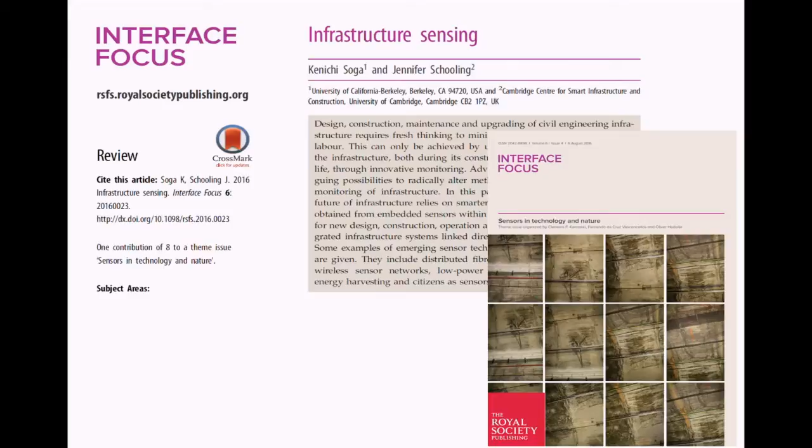They're doing a 5 year renovation, started in 2013. The London Bridge Station is one of the oldest stations in London, and there are a lot of passengers per day using this particular station. The challenge is that this renovation is done over 5 years' time, so trains are working as well as construction happening. It's a very busy station.

As I said, London Bridge Station is one of the oldest stations in London. Of course, in San Francisco we have old things too, but in London there are even older things. You can see that in 1836 it started as a sort of a purple part and kept on expanding, and you can see how it started in 1836 and then how it looks like right now.

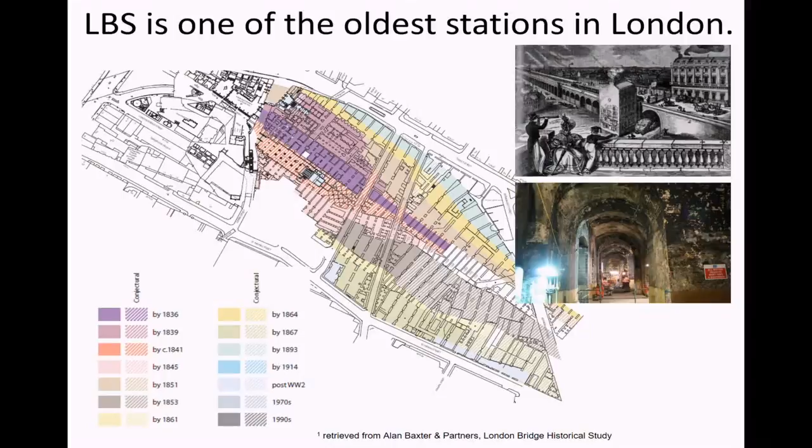Then in the 1970s, they said, okay, let's try to change the station dramatically. London Bridge Station was last redeveloped in the 1970s, and in 1972 they had a vision of trying to change the station: two old rail stations would be merged into one with higher capacity, giving easy interchange between buses, tubes, and trains. As you know, tube is subway.

And direct access to all services from a spacious concourse with new bars, buffets, and shops. So bringing all things together. In 2012, right now, there's a new renovation happening over at London Bridge Station. And the vision there says the number of platforms will increase and the track layout will accommodate higher capacity trains. At the same time, existing bus, train, and Underground services, like the Tube, will link to the largest concourse in the UK, which will offer a variety of retail services like bars, buffets, and shops.

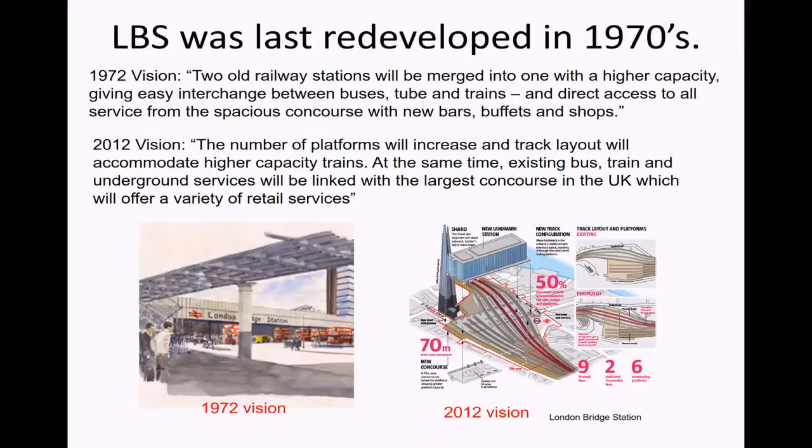So again, after 40 years, they're saying the same thing. But in civil engineering, we tend to design our infrastructure for 100 years, 120 years design life. So there's a mismatch between how we use our infrastructure and how we design our infrastructure. Think about this as the population of London. I stopped here in the 1970s when they were doing this first big renovation. So London's population was going up, and after World War II, it started to decline. If you're over here, how do you want to predict?

So then you start to say, okay, what's going to happen in the next 100 years? But what really happened to London is that it went like this. And these are the predictions. So you can see how we predict over here, and then the usage of the station changes as the economy changes. But then we tend to design for 120 years. So there's a mismatch there. Again, this is a prediction after, as you know, Brexit. We don't know what's going to happen. So again, that's the difficulty we have.

So our 100-plus design life concept may not be compatible with the actual demand in the future. Is it? And then making our civil infrastructure, so I'm a geotechnical engineer, more adaptable. So rather than making a very rigid structure, can we make it more adaptable? And I think in the building sector, that started to happen. Are we over-designing it? That means that we're doing 120 years to make it really, really strong. But actually, in order to do that, we need to understand the actual performance to improve our design.

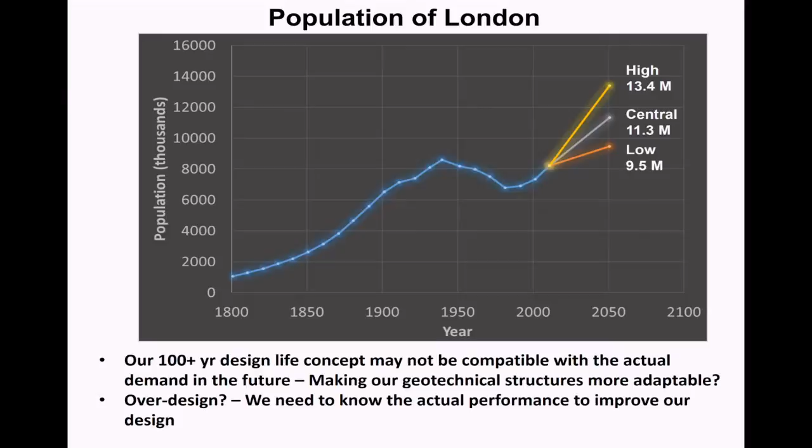So at London Bridge Station, we've been trying different things. Of course, the difference between the 70s and now is that we have the Internet of Things, a lot of technology that evolved in the past 40 years. So I'll talk about fiber optics monitoring, but you can do computer vision technology or count the people very quickly and then do some real-time monitoring of movements. Wireless noise monitoring, because they have hospitals around, to make sure that the construction doesn't produce much noise. Social media tracking.

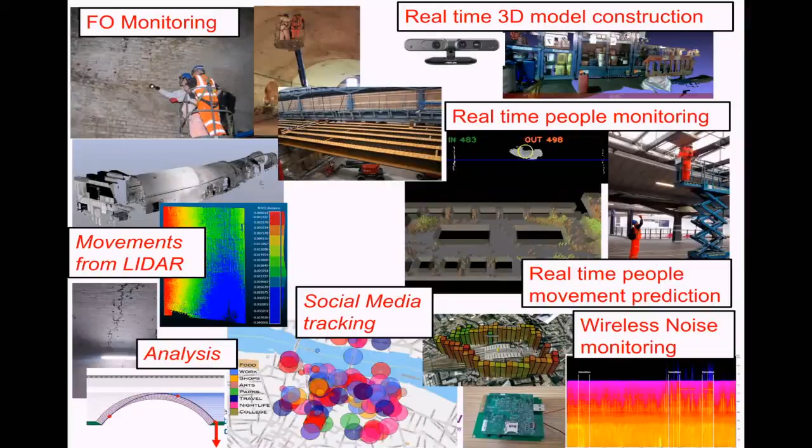And then, as a civil engineer, you want to use some movement and make sure that we do engineering analysis. So, for example, this one is predicting during the construction how people are using the station, and also doing an agent-based model to predict how people are using it, trying to do that more in real time. So when the train comes later, how do people use the station, and can we divert the people in a better way? And that started to happen using these sorts of simulation techniques coupled with monitoring of people.

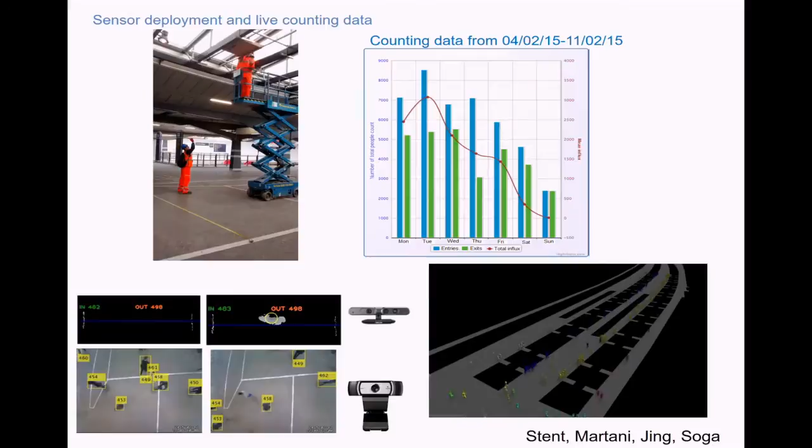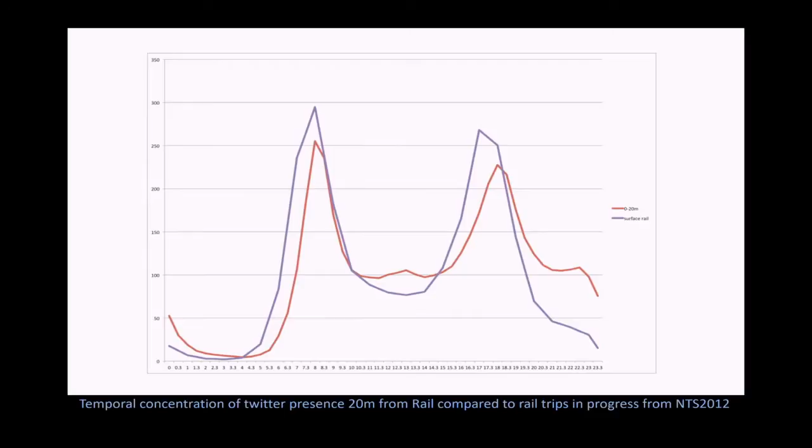This is the Twitter usage of that station, and you can see this is one day, the frequency, and it shows a peak in the morning, and then in the afternoon when you go back home, it peaks again. Which one is Twitter and which one is the actual counting? The red one is Twitter, because Twitter people come late to work. They may go later and have fun. But then you can get the data without using much manpower. Looking at the Twitter data, perhaps you can see how stations are used.

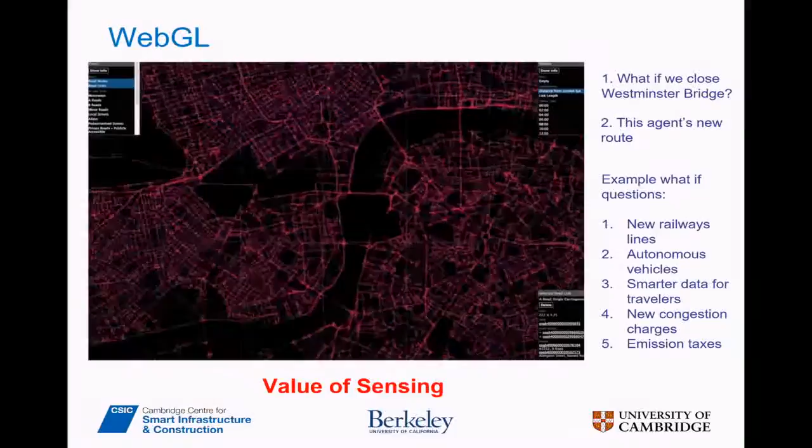So you can start using all these sorts of techniques, like this is a WebGL base where we're looking at London as a city, as a transportation network, as well as the railway network, how people are using it. And nowadays you can use Transport for London data or Google data. We accumulate all these together. And then behind that, we start to look at scenarios. For example, what if we close Westminster Bridge?

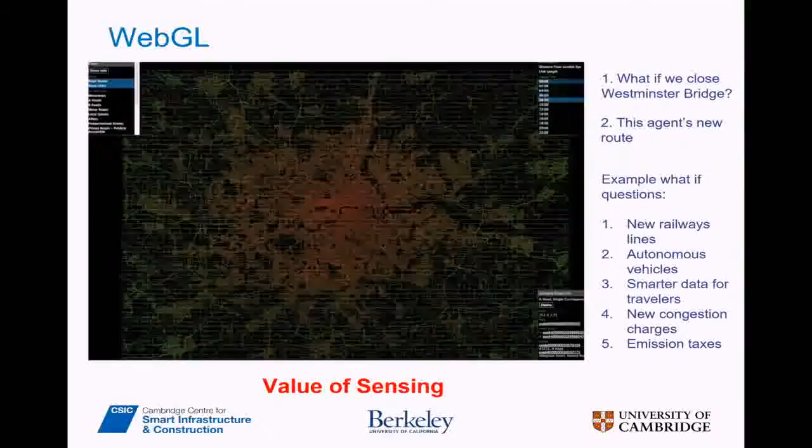There's a new agent, so if you have new railway lines, if you have autonomous vehicles, smarter data for travelers, how do people do? And then you can start looking at how in terms of policy-wise. But it's really trying to figure out value of sensing, because you want to put sensors, like me, I want to put sensors because that's my research. But then people say it's too expensive, so you have to start showing the value. And I'll come back to this value more.

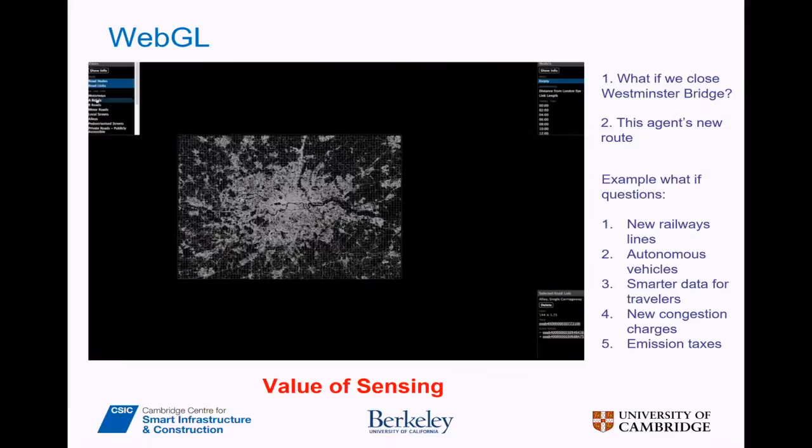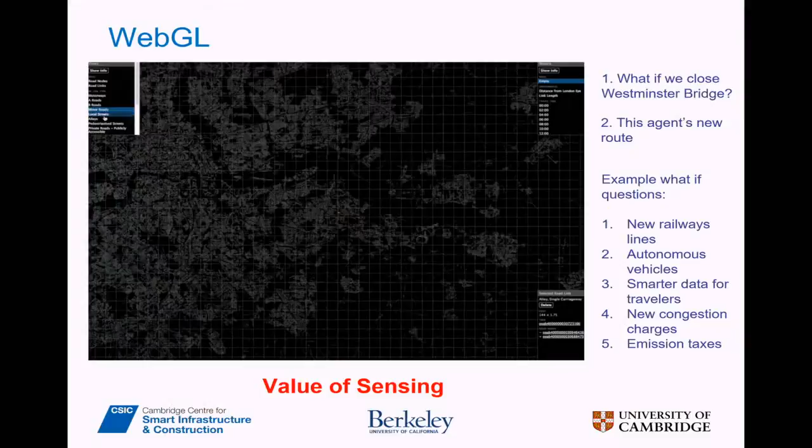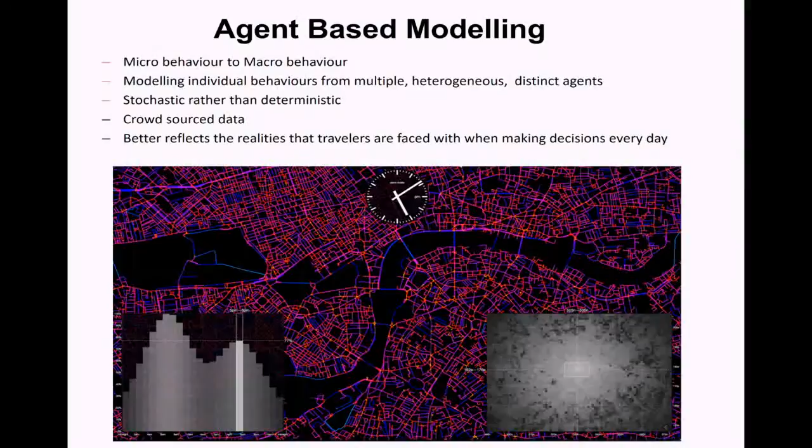But you can see how interesting the computer science is coming into, of looking at lots of data of different things. Some data comes every second, some data comes every year. So for example, we're looking at road maintenance. This is an agent-based model. Basically, you have agents within the city and then see how micro behavior addresses the macro behavior. And these are very computer intensive. By using high-performance computing, it starts to become realistic using crowdsourced data. So these are interests to our civil engineers.

So for example, if you have these data, can we do road degradation better? Because at the moment in London, we only have data every year, one particular point every year. And it would be great to see how people are really using the road and how they're reporting, but also see the real degradation of the road or railway using those data.

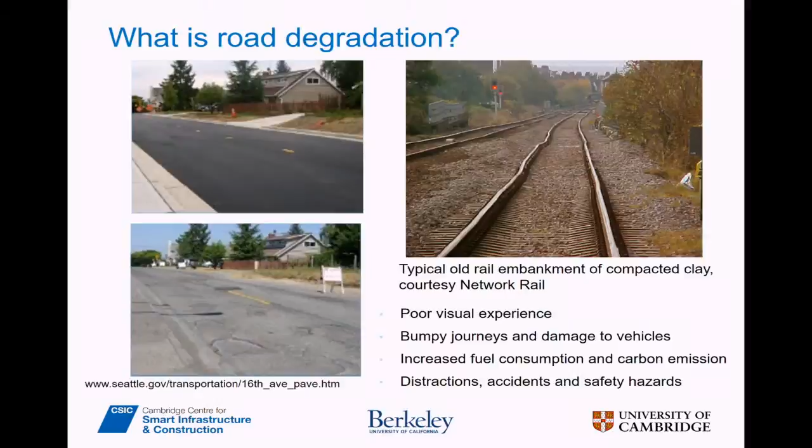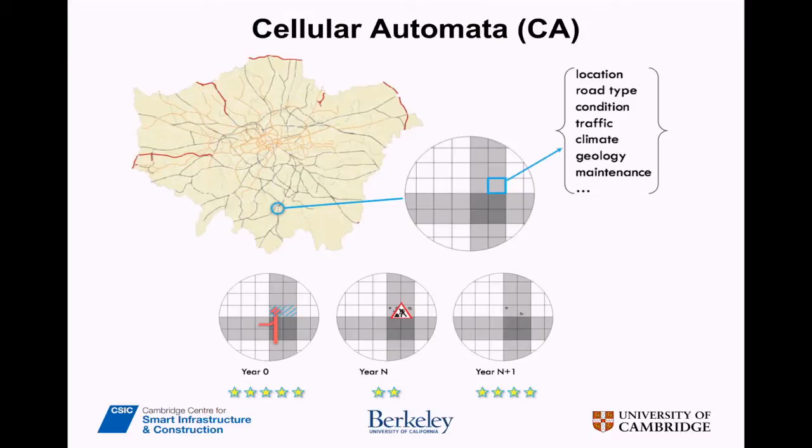And that leads to another technique called cellular automata. It's really a sort of land-based, agent-based model trying to see how the roads are degrading, using crowdsourced data. So that's something we want to go further in civil engineering. But what I'm trying to introduce today is really about sensors.

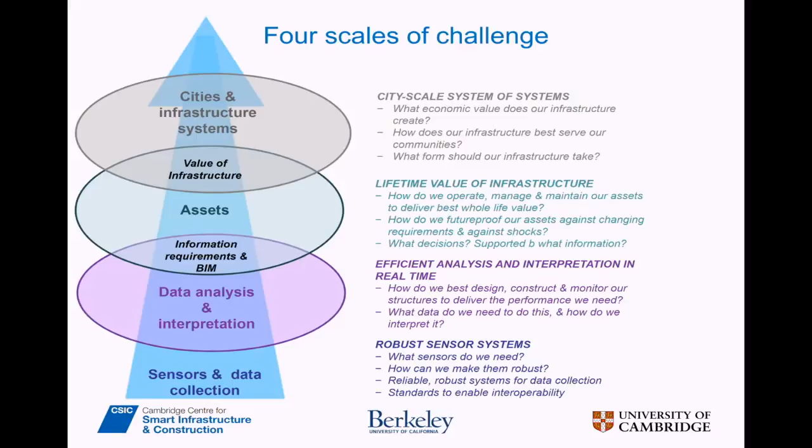The strategy is having sensor data help us understand assets like bridges, roads, or tunnels in terms of data analysis and interpretation. That will lead to how you manage your asset. And once you know how to manage your asset, the city will have different assets. So how do you combine these together to look at the whole city? There are a variety of questions at different scales, but our real interest is how these data come across throughout the scales. That's the challenge, but that will be our interest as civil engineers.

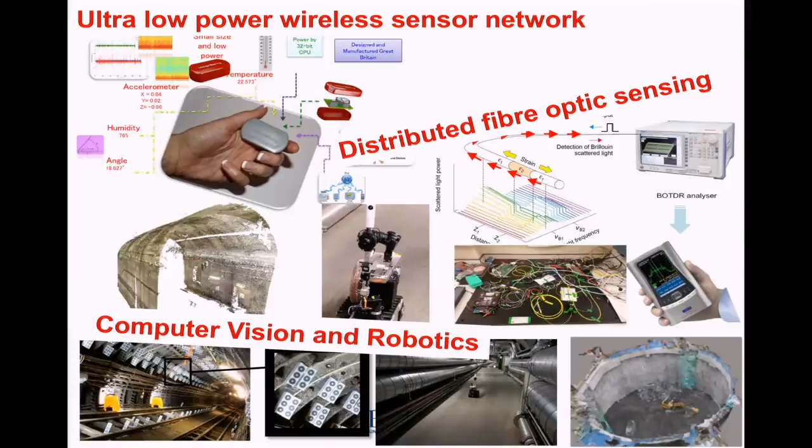When I was at Cambridge, and I continue to do so, we've been working on ultra low power wireless sensor networks. I'll talk about distributed fiber optic sensing because this is quite interesting technology from my point of view, and computer vision and robotics.

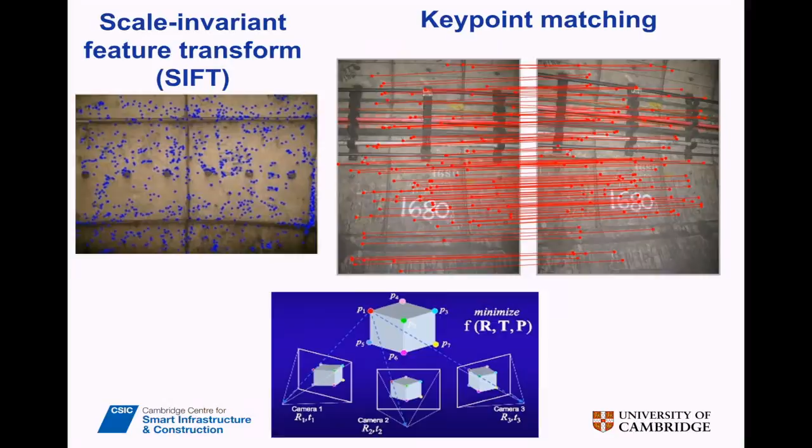So for example, computer vision is quite interesting for civil engineers because if you go to a tunnel, each concrete panel looks very similar to you, but from the computer vision point of view, it has a fingerprint. If you have two images from different angles, you can match the fingerprint, and for a given point, with 3 images or 2 images, you can triangulate to create a 3D model. You can also see where your cameras were at that time. So that allows you to start creating a model just from images.

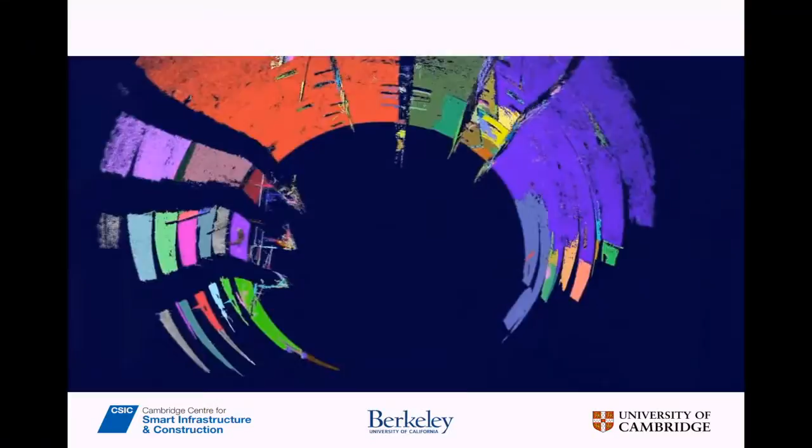So really taking images, this is work done closely with Toshiba, and then reconstructing 3D points, so just from the images you can create a 3D model. Then you can see what the model looks like. You can see some of the cables which you don't need, so you remove them. But you can see very detailed structural components just from the images. And then you create a 3D model to do engineering analysis. The important thing is that after that, the actual 2D images will have 3D points.

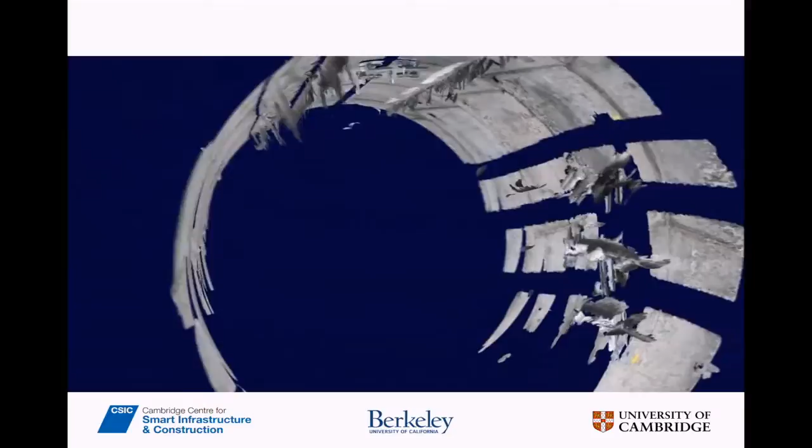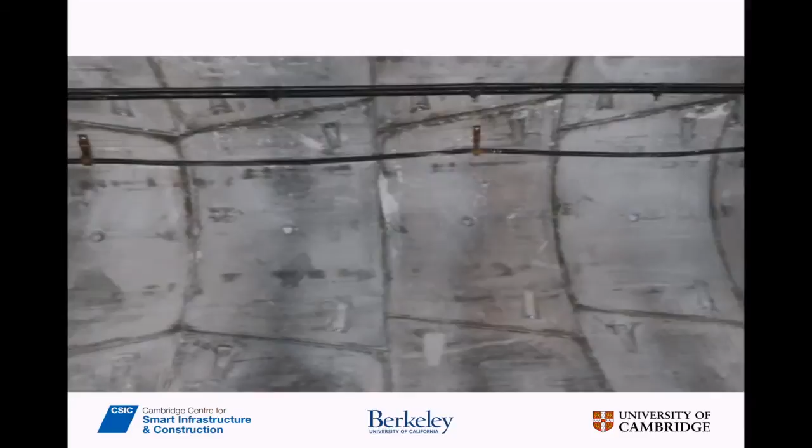That means that you can attach the images on top, mosaic it in terms of images, and put it onto your sort of a cylinder in this particular case. And that gives you a map of your tunnel with images which is very, very highly precisely calibrated in terms of the coordinate system. Once you do that, you can have it like a globe, and you can make it flat like this. But then each point has 3D points.

So let's say later on, if you take another image about 1 year later, you may have a new splash over here. What you want to do is compare with the images from 1 year before, but they may be taken at different angles. But because each has a coordinate point, these old images can be warped to the same position that the new images are taken. So this one is rotated so that you're looking at this image from the direction of the new image, which allows you to do change detection.

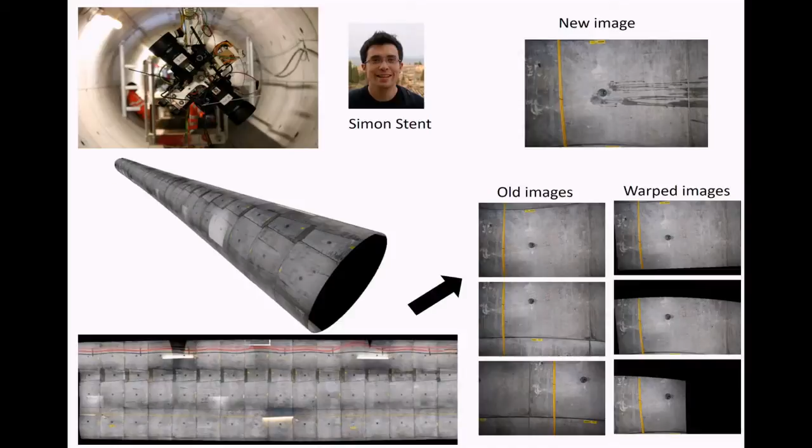And so in tunnel engineering, what we're interested in is cracks. What kind of cracks are we interested in? Actually, we're looking at 0.3 millimeter cracks, and are they growing or not? So this is the scale that we're interested in. We're not interested in 1 centimeter or 1 inch. We're interested in really small movements. And by doing that, you can take an image and then see how things are changing.

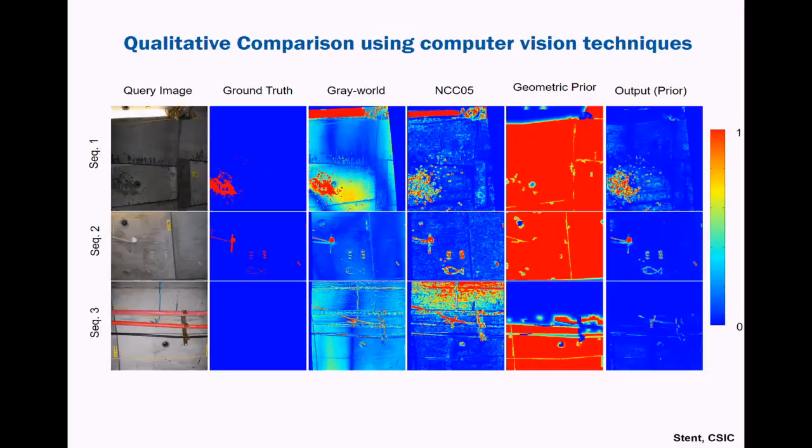And you can use certain computer vision techniques and machine learning techniques, perhaps, to find the change detection. For example, these are the splash markers, and these are different algorithms to find the change detection, ground truth versus some sort of analysis. This one is another ground truth. If you look very carefully, there's a small fish that our student drew on the tunnel lining, and it does detect it. But for example, this one, we didn't do anything, but it did detect something.

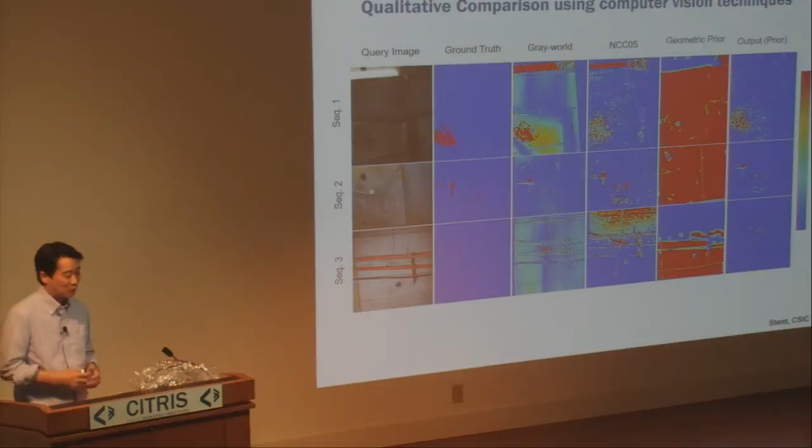So there are still a lot of things to do, and my point is that nothing is perfect. I think we have to do more research in this area, and I'm really interested in working with some of you who may be interested in this particular area.

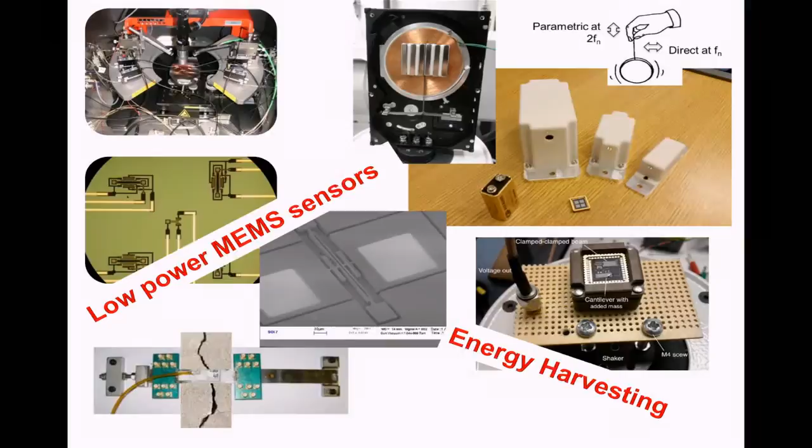Some people, like for bridge bearings, actually want to know how many small movements you had per day, how many mid ones, and how many big ones. The numbers may be very interesting to us because that tells us how it degrades with time. But the point is that if you have one data point, you miss that particular event, and then it's gone. So having information about the history is very, very interesting for us. That requires low power, but energy harvesting can do that.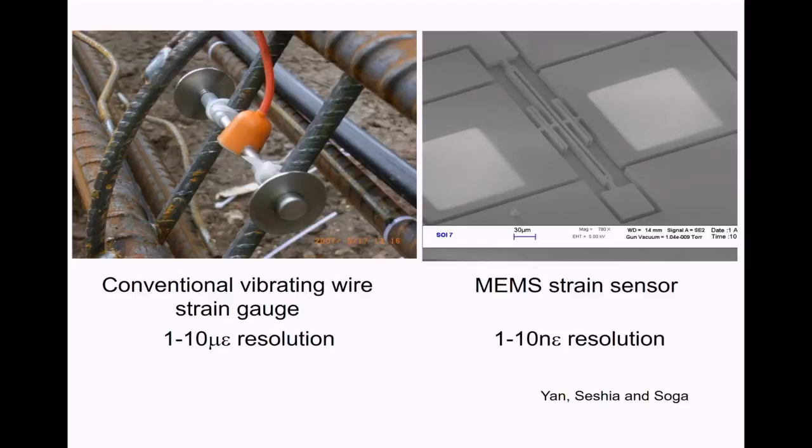For example, in civil engineering, we use a device called a vibrating wire strain gauge. This is a strain gauge which is very, very robust. Within this system, it has a string inside. If you strain it, pull it, or compress it, it's like when you play a guitar: if you tune it, you change the resonant frequency and it gives you a different sound. So that's the same thing. If you stretch it more, the resonant frequency changes, and that's how it works in this particular system.

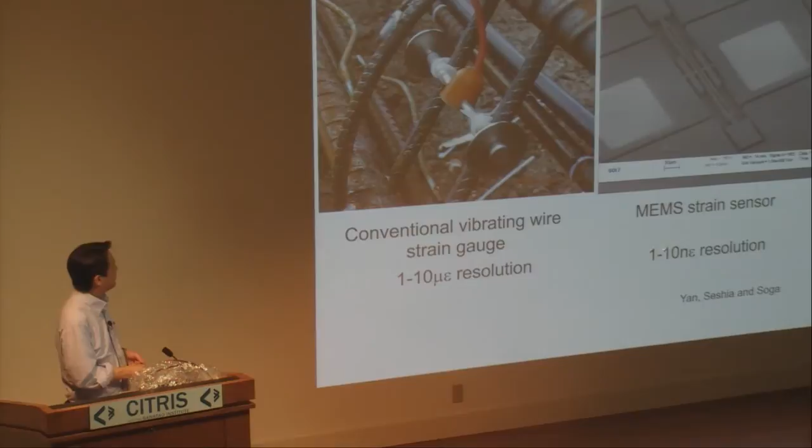And we made a MEMS version of that. So this is a MEMS version, which is small, but also made in a certain precise way. This one may give you 1 to 10 microstrain. This may give you 1 to 10 nanostrain. Whether we need it, I don't know, but it'll be fun to see if you get the data.

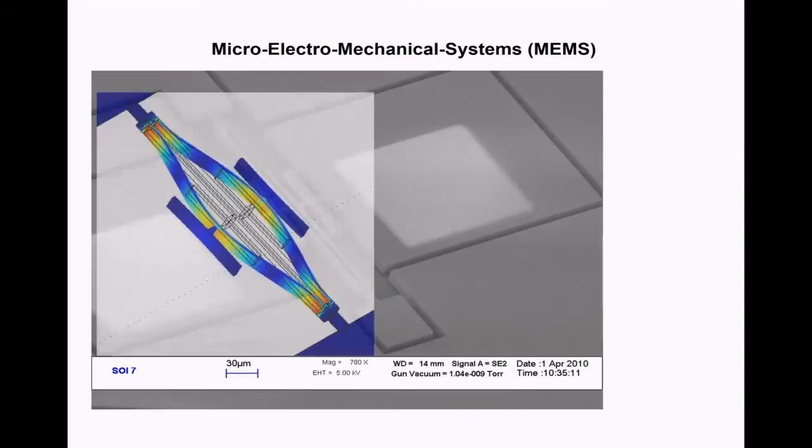So again, you have this structure made using MEMS technology. You have a suspended beam, and these are the 2 points that will strain. For those who are in structural mechanics, this is the one that gives you the vibration of that particular structure at different strain levels. My structural engineering colleagues will say this is easy to analyze. So this is really a small device. This gap is less than 1 micron. But you actually do a resonant frequency analysis of these devices at different strain levels.

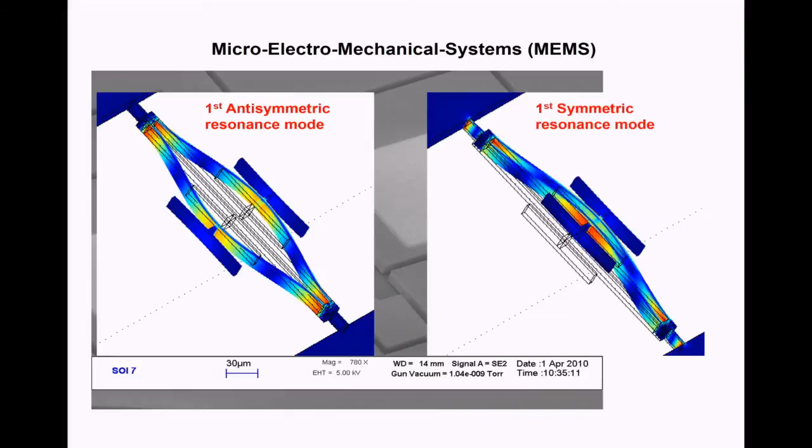So once you do that, actually, you have this amplitude versus frequency, and if you apply different strain, the peak frequency moves, and that gives you how much strain you applied. And by putting these devices at different directions, you can get strain at different directions, because, as you may know, strain is not only one direction. Actually, in reality, we have 6 strains in structural mechanics.

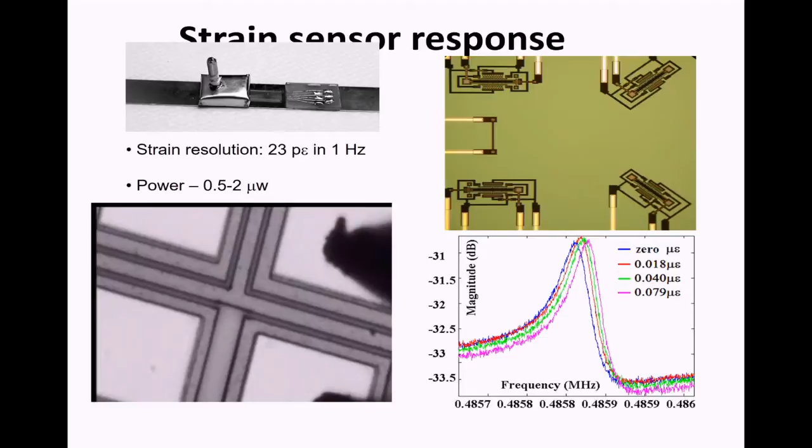But the point is that these are small devices. It can be just fun, but if you have a very good eye, it's moving. Can you see? It's an eye test, sorry. But the point is actually it has a very low power, which is quite interesting for us.

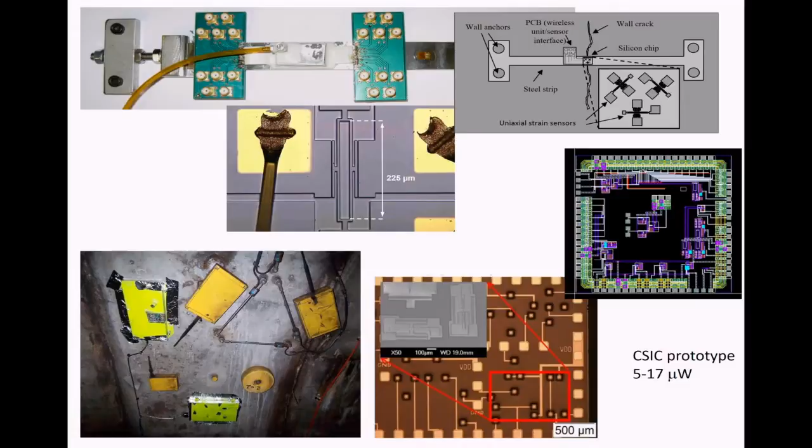So in this particular case, we made this device and put it in a tunnel in Prague, in Czech Republic, because this particular tunnel was flooded in 2000-something. And then the issue is, after the flooding, how is the degradation happening? So we wanted to monitor.

So there's a crack over here, and above here we had this crack gauge, which is a simple crack gauge. But it did have this MEMS strain sensor, which is aligned this way to understand if the crack is really opening or if it is sliding relative to each other. And then you can make it as a sort of a chip, which we're trying to do at the moment.

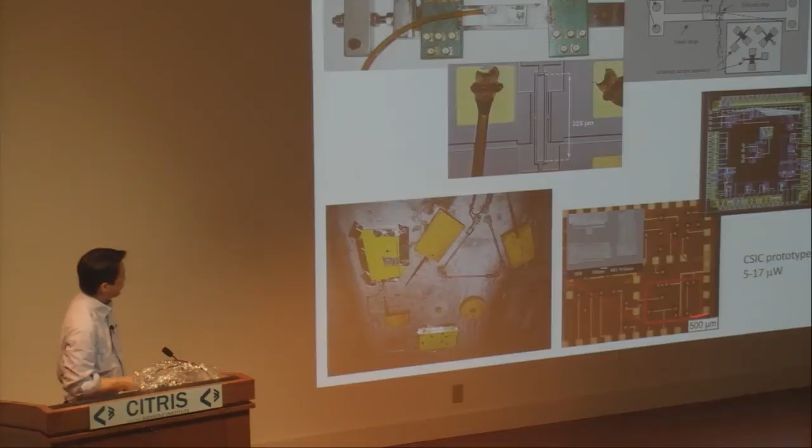So if you have a sort of a strain sensor or accelerometer, you see accelerometers. Some of your iPhones do have these accelerometers, cheap ones already, and they're very cheap. So you can make the strain sensor. I haven't seen much in the market, but we hope it will come in. But if you have these small, low power sensors, energy harvesting like vibration, temperature, pressure fluctuation, airflow can power it up to get the data. And once you need the data, you may send it wirelessly.

So in terms of power, there are a lot of ways to get power. If you walk, you can get power. Water mains, actually, if you look at water mains, water pressure fluctuates at a very low frequency, but you can sort of ramp it up to get this pressure energy, like winding your clock, for example. You can have solar power, but in tunnels, which I work on, it doesn't work. And then airflow is good for tunnels because, as I'll show you later on, when a train passes you have flow. And then vibration is another one, but temperature is also an interesting one as well.

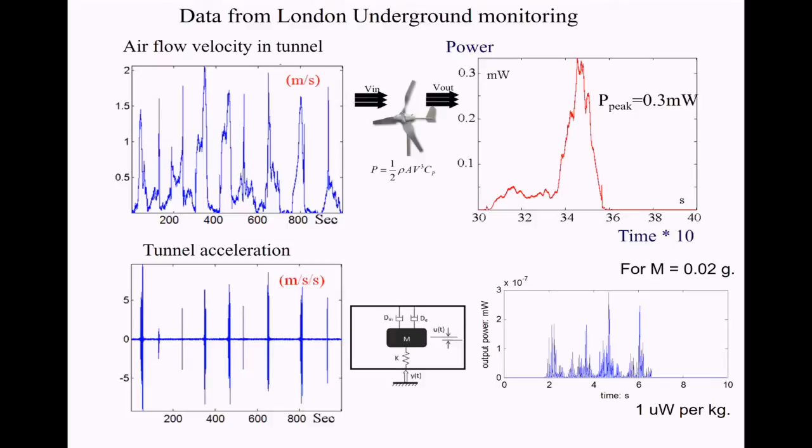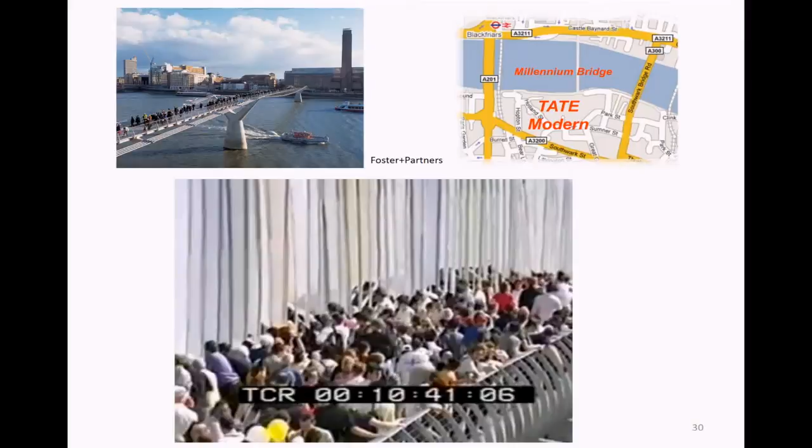Tunnels do vibrate, so you can have vibration and then try to get energy through that and then keep on monitoring your infrastructure through that. Vibration is very interesting. So I'm not sure you've been to London. If you go to Tate Modern, which is a very nice museum, which is over here, they made a new Millennium Bridge in 2000. The bridge was interesting because when they started opening it, people started walking, and it wobbled a lot.

So people are walking, and then the bridge is moving a lot. But if you look very carefully, people are rather synchronized. Initially, they walk in a different way, but then eventually they synchronize. See? Can you see it? That's really interesting. And probably you may have seen this because some say they've seen it.

Now, this is Professor Ikeguchi from Saitama University. He had a bridge with metronomes, lots of them. So you keep it going. You keep it going. And you keep it going. For about 2 minutes or so, it becomes like this. There are some odd ones. But if you see it, it will come together. So it's so fun, actually, in terms of vibration.

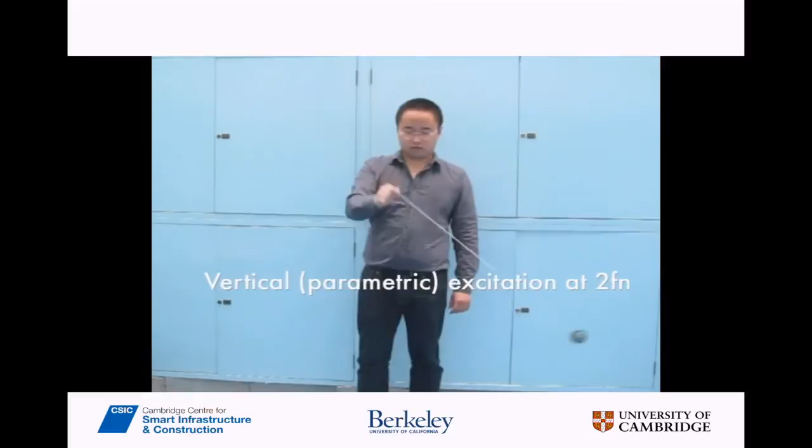When a pendulum is allowed to freely swing, it oscillates at the natural frequency, as you can see in the horizontal direction here. As I apply a horizontal driving force at this frequency, resonance is achieved as amplitude builds up. However, if I apply a vertical driving force at 2 times this frequency, amplitude can grow even larger as parametric resonance is activated. So it's a sort of nonlinear vibration system.

A scale piezoelectric vibration energy harvester prototype mounted on a mechanical shaker. It is currently driven into direct resonance. Take note of its displacement amplitude. So this is direct resonance. Now this is the parametric resonance. The prototype is now driven into parametric resonance at the same acceleration level. With time, the oscillatory amplitude grows to a much larger level as an internal energy buildup is achieved. This demonstrates the superior efficiency of parametric resonance over its direct counterpart.

So that sort of interesting nonlinear vibration can be used to absorb energy, for example. If you don't believe me, I brought a yo-yo, so you can have fun later on. That particular device is shown as a yo-yo, and then, of course, there's a threshold that you have to kick in, and that's where you have your engineering. How do you make that threshold smaller, and then you make a macro device.

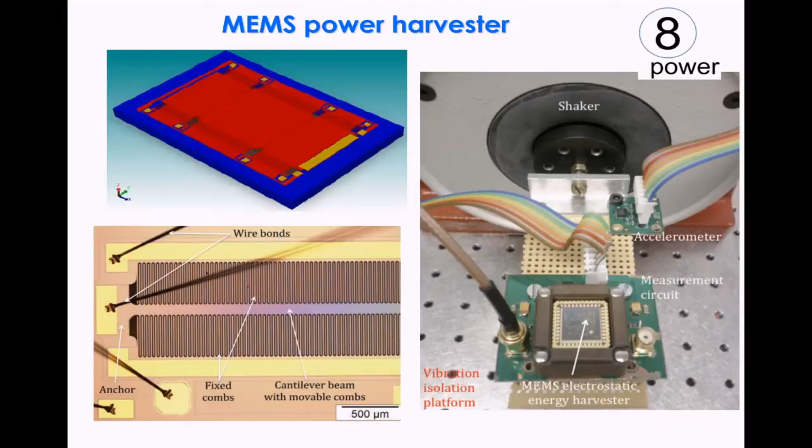So this is one of our macro devices that has that yo-yo inside, but it's not a yo-yo. You can make these in different shapes or sizes depending on your need, but of course, the bigger the mass, the more energy you can absorb. But you can make a smaller MEMS version of that, and you can have lots of these to generate enough energy to power, for example, this MEMS strain device. And actually, we spun out these devices, so we have a company called 8Power working on that.

So what I really wanted to say in this talk is that value is not a product from our point of view. It's about confidence in delivery in civil engineering. I can't sell you the product by doing TV commercials. I have to do a lot of things to demonstrate it works in the real field. My colleague from London Underground, Keith Bowers, says that innovations have more chance of adoption if their benefits are mapped. We have to show where the benefits are coming from. Rather than just saying, please buy my product, it's saying you're going to get this data, and this data will give you this.

And of course, best practice is very important. My colleagues and I recently wrote 2 books on distributed fiber optic sensing and wireless sensor networks, published through the Institution of Civil Engineers. What I want to focus on in the next 10 or 15 minutes is a technique called continuous strain profiling using fiber optics technology.

So this is a typical optical fiber, which I have over here. I have different types of cables because some are cheap and some are expensive, but I can pass them around to you. The white one, you can do anything with because it's the cheapest one. But the expensive one, actually, you can't do anything to because it's so robust.

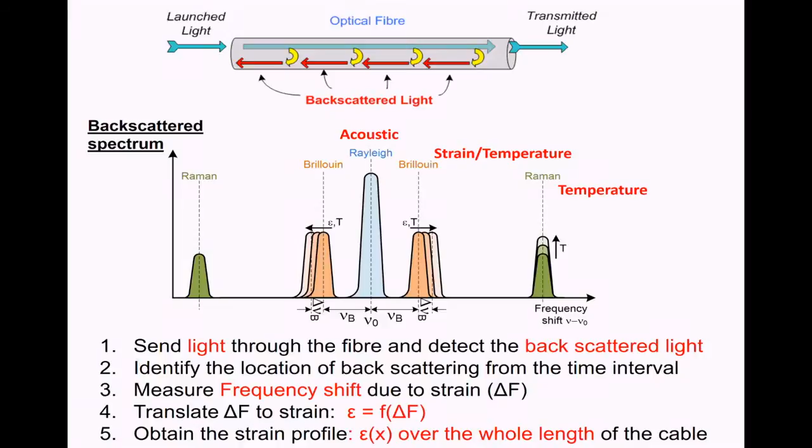So you shoot a light, and let's say if I have a strain at some point, the frequency shifts, and that's what I want to measure. If I can measure that, it tells me how much strain is occurring at that location. I can do that for all the places. That's what the analyzer does.

The analyzer can be expensive. But before that, there are cables like this. The white cable you've been seeing, which only has 1 millimeter or 0.9 millimeter diameter, is probably about 10 cents per meter. The very robust one, used in our civil engineering, is about $15 US per meter. Why? Because probably we're the only ones using it. If all of you start using it, maybe the price comes down. But this one is good because you have the optical fiber coated around a strong nylon with a steel wire to protect things.

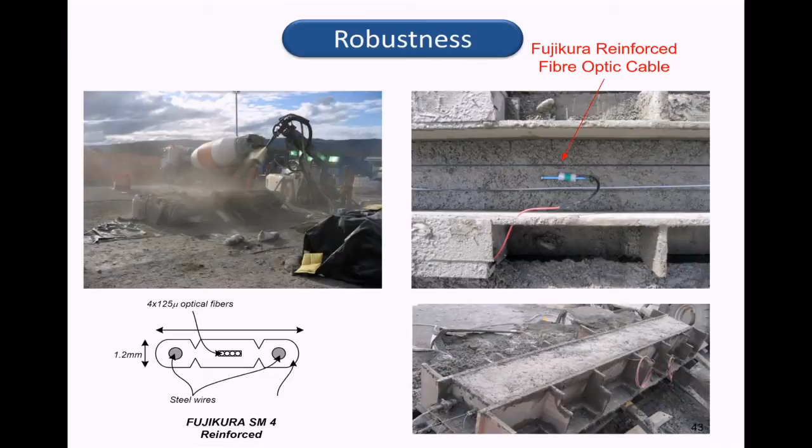You can get different versions with low robustness versus high price, but it's about how you embed these in the structure. For example, when we make tunnels, we excavate the tunnel and do what is called spray concreting. We embed the robust optical fiber, and when we spray concrete, we make a concrete block where the fiber is embedded, and they happily survive.

The analyzer is expensive at the moment. It probably costs about 100K to 200K each. So within my research team, about 5 years ago, I said I can't pay 100K every time I buy these. So I said, let's make our own. Now we make our own analyzer as a research tool.

Now we're moving to more dynamic sensing. Previously, people were measuring static strain because it takes a few minutes or so to get the strain profile for 10 or 30 kilometers. Now we're trying to go dynamic, measuring strain profile dynamically up to 100 hertz, which we're interested in for civil engineering. This lets us look at more vibration characteristics as a distributed strain, not just a point strain.

Just to give you a nice example, this is London again, sorry. This is a masonry tunnel, 100 years old. This is called King's Cross Station, and this is St. Pancras Station. If you want to go to Paris, you take the Eurostar from St. Pancras Station. If you want to go to Harry Potter World, you take platform 9 3/4 from King's Cross Station. But that's where it is.

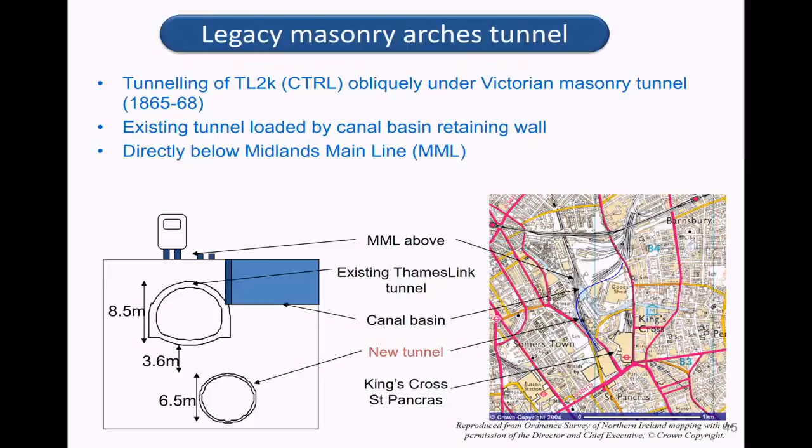So what you can do is attach the optical fiber like this in cross sections. In this case, 5 different cross sections and 3 longitudinal directions. You attach the optical fiber.

This was our early days of research, about 10 years ago. You can see a white cable, our cheapest white cable. We went to a DIY shop and bought this hook. You drill the hook, and then pre-tension it so that we can measure tension and compression throughout. Everything is one line, it combines to one line, and it goes to the analyzer.

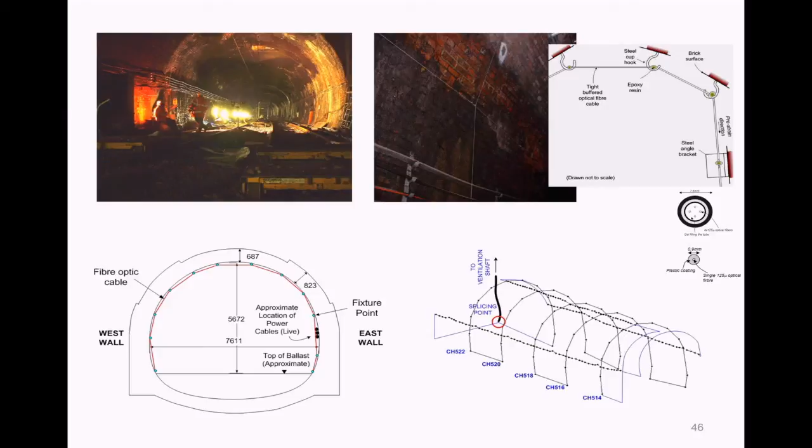So what I'm going to show you next is an animation where you have a new tunnel and an old tunnel. When the new tunnel is made, it drags the old tunnel downwards, and this tunnel will get vertically elongated.

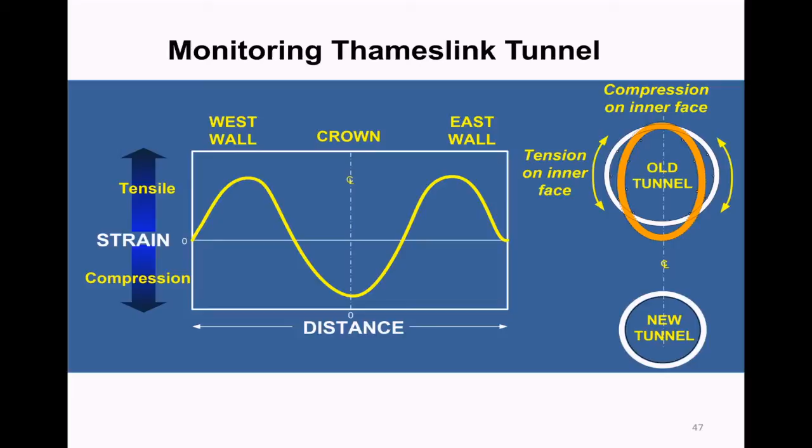If you put that cable around the tunnel, you see tension at the 2 sides and compression at the top. The distributed strain profile will look like this with distance from the west wall to the east wall to the top of the crown - tension, going down to compression, and coming back to tension, like a butterfly shape. Because the tunnel is not excavated directly underneath, sometimes it goes diagonally, so this position will move to the left and right depending on the position of your tunnel.

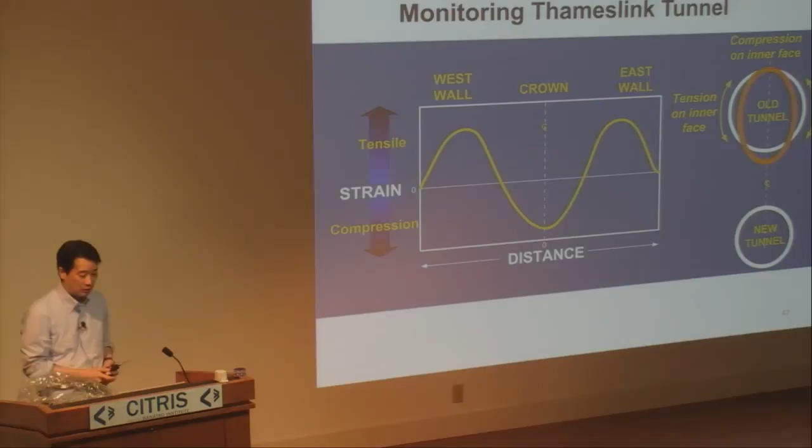So this is the animation I'm going to show you. This is the old tunnel where we had 5 cross sections, and the new tunnel will be excavated underneath. These are the graphs - 5 graphs of 522, 520, 518, and all these things. This is the initial strain profile, which is 0. We baseline it, and when the tunnel is made, these will start to respond. 518 is the one that goes underneath, so hopefully you'll see that butterfly shape.

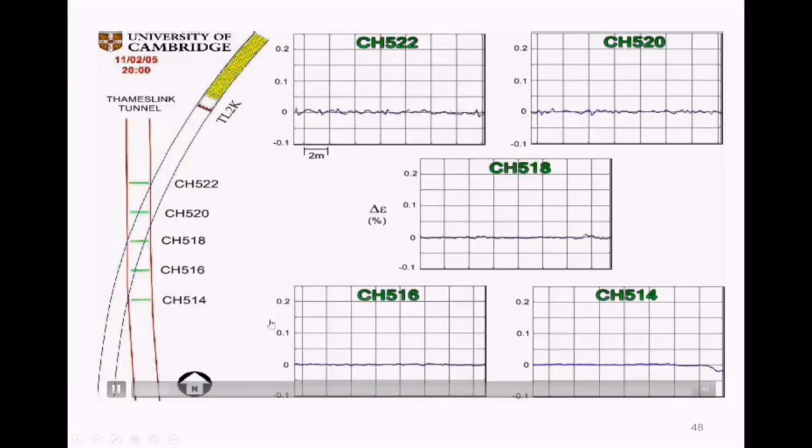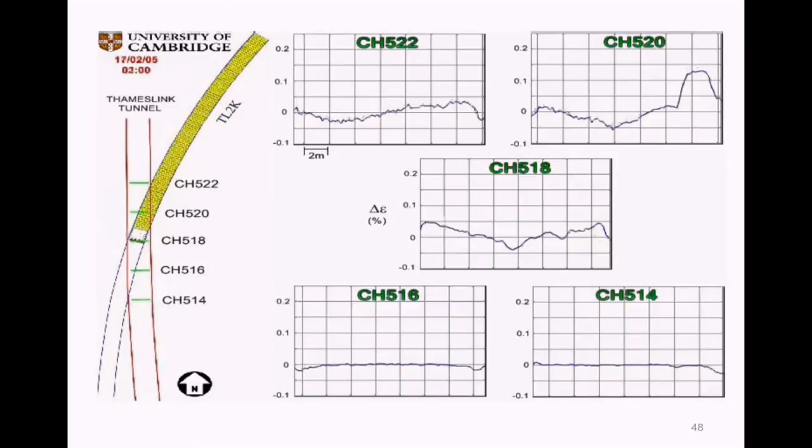You can start to see 520 showing a similar thing. Just past 520, it goes like that. Then 516, and 514.

So this allows you - if you only have a few points, it's very difficult to understand the mechanism of how tunnels are moving as the new tunnel goes underneath. That's the beauty of this technique: you can get a distributed nature of the movements, and see how much strain is developing.

This side is about less than 0.1%. Here you start to get a little bit larger. Look at this one - it goes to 0.2%, but then it goes down, implying that the critical moment is when the tunnel face is right under where you're interested. As it passes, you have less strain. So distortion happens when your tunnel goes underneath, which is obvious, but then you start to get the mechanism.

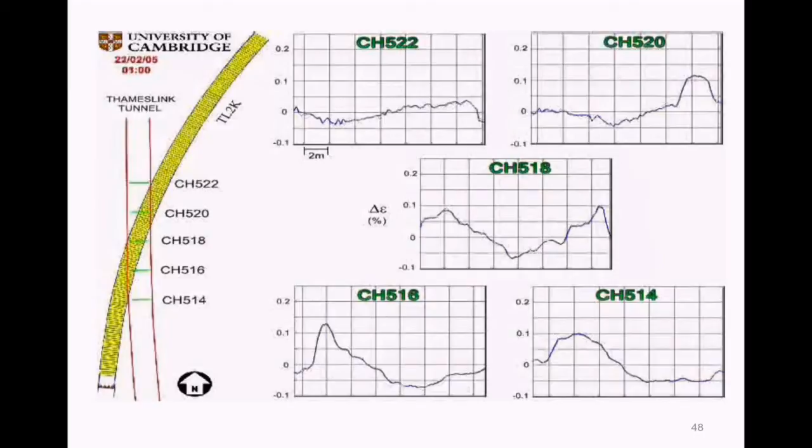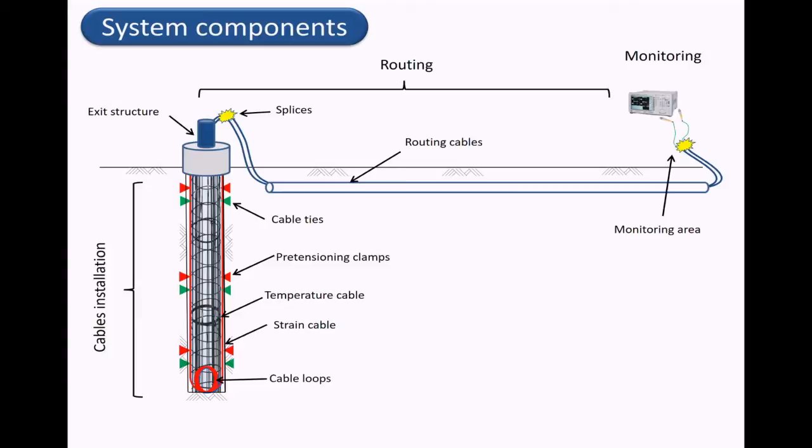So you can put this in piles. For example - sorry, I'm a geotechnical engineer, so I'm interested in underground - you put fiber optics in the piles, and then put everything together, and route your monitoring somewhere else. Oh yes, and I have to protect my analyzer because it's very expensive at the moment.

So we tend to sleeve around and make the building load go into the chalk in this case. But we want to know how much friction you can have, and what end bearing you can have in these piles.

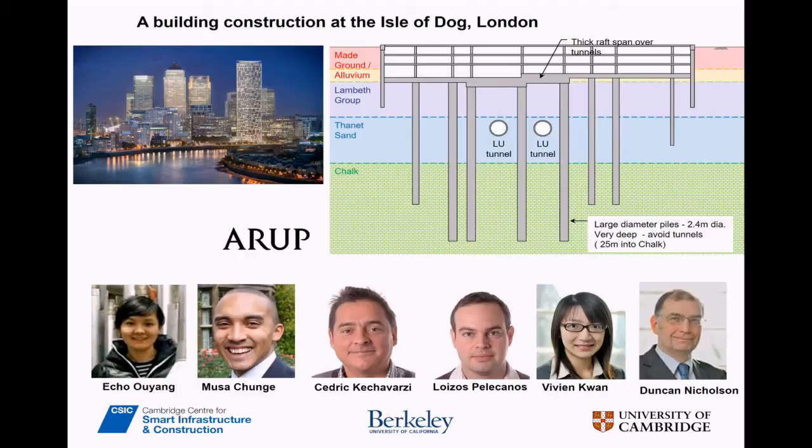So what you can do is load the system and then measure how things are going. This is one technique called O-cells, where you load the pile. These are sacrificial piles, loaded to see how the pile responds. I put a load that pushes the pile upwards, but also downwards. By pushing upwards, I can see how much friction develops between pile and soil, which allows us to design these piles. Pushing down gives you the end bearing of the pile, how much resistance at the bottom.

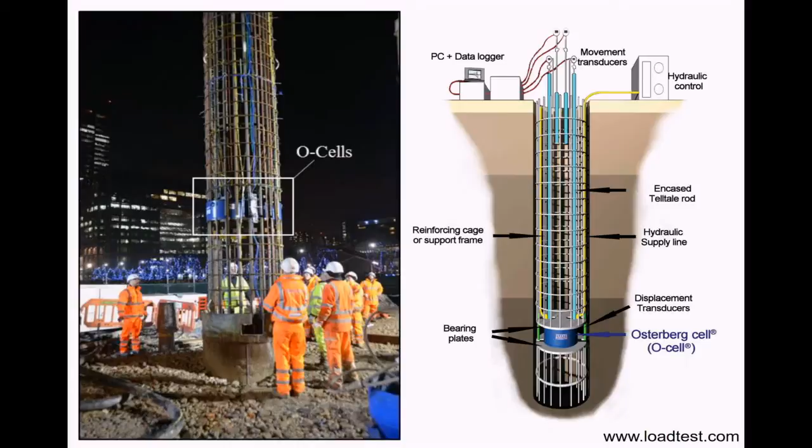Now this is done quite cleverly because the load is self-reacting against itself. Think about if you wanted to do load testing from the top - you'd have a large pile, 50 or 60 meters long with 2.4 meter diameter, and you'd need a very big loading system. It would be too expensive. But this allows us to measure the friction and that sort of thing through that system.

But the point is you have to install your fiber optic cables, so you put your cable here. These are cages - you drill the hole, and inside it's filled with bentonite slurry, a very heavy liquid, to make sure the hole doesn't collapse. After that you put this steel cage in, and once finished you pour the concrete from the bottom to create a pile. That's how we create a pile. So for those not in civil engineering, now you know how piles are made.

Interesting, isn't it? But the point is when you make this optical sensing instrumentation, the guys making the piles aren't interested in fiber optics - they're interested in making a pile and going home. So it's important to make sure you don't disturb these guys. One approach is you have a cable on a drum, and as the cage goes down, you roll it in. As the cage splices, you clip it and it goes in. All these guys can do it and then go home. Cambridge University academics at that time don't have to do anything.

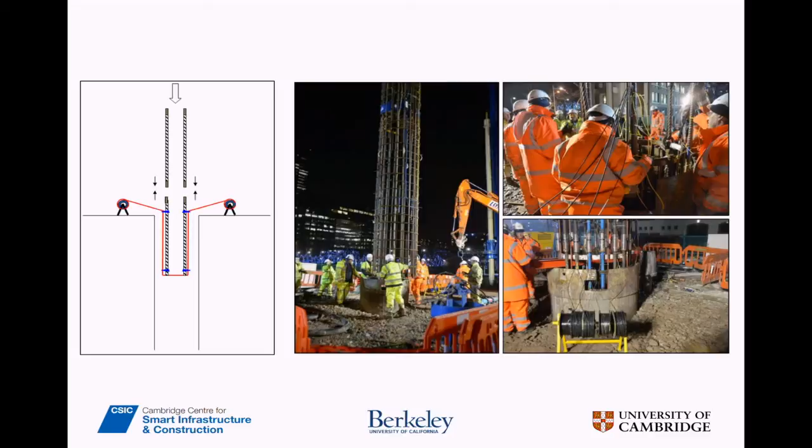And that allows us to get less disturbance. Actually, they start to like this technique, which I'll show you why. But the point is that's how you do it. You put this sensor in the concrete, and then you do the loading.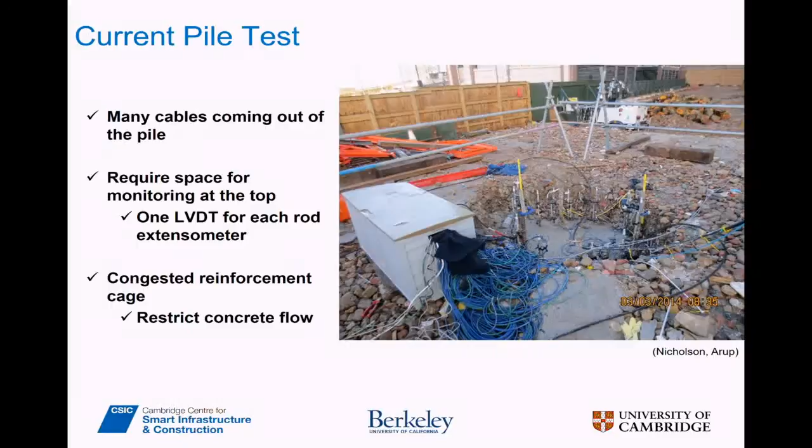If you conventionally want to measure strain, you have each strain sensor coming out with each cable. So if you have a pile like this, we tend to have 6 levels, 4 at each level, so you have 24 cables coming out - it may look like this. But if you use fiber optics, it looks like that. So it's clean and nice.

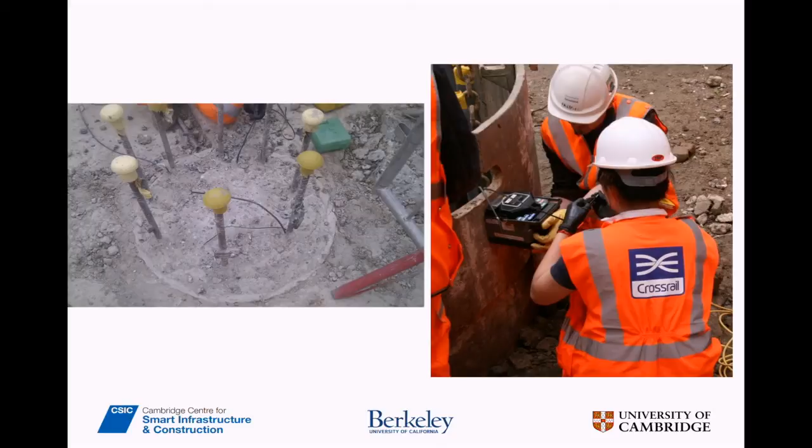Of course you have to make sure it doesn't break during construction. So the point is you have this sort of pile - this is what we call a tremie pile, where you inject your concrete, and as you lift this pipe, the concrete fills in that particular place and creates a pile. This is what the cage looks like at the bottom, and the optical fibers are attached at 4 different locations.

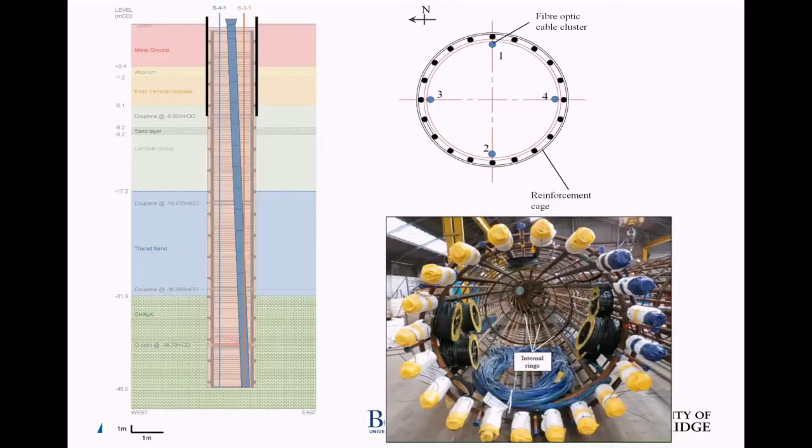What you can do is have a cable that goes in and out - into the ground, to the bottom of the pile, and back up. Then you do the same at different locations, going down and up. You can change it to a strain cable that goes down and up as well, so you can measure both temperature and strain.

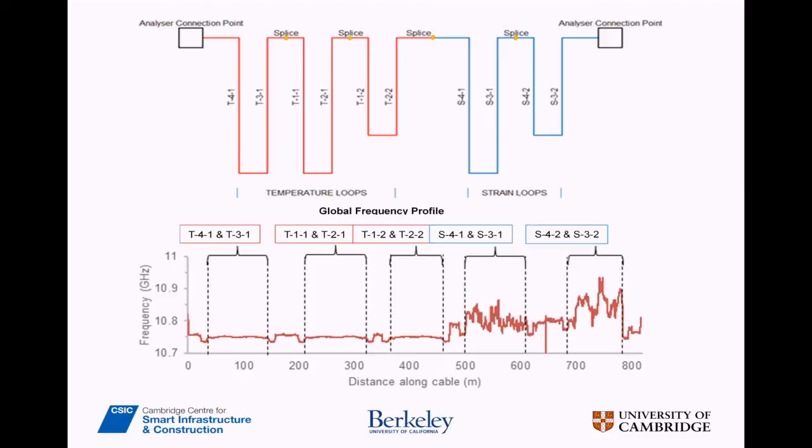But when my colleagues saw this, I said, oh, Kenichi, I don't like this data because it goes up and down and up and down. And typically, if you're paying somebody, you say, I don't like the data, I'm not going to pay you.

But the point is that this one is interesting because if you see the temperature at the beginning, it also shows a similar sort of frequency, which is about 3 meter frequency, which is different from the actual frequency you can get from the random noise of the analyzer because you're getting every 5 centimeters. So these are much larger frequency than the others.

But by having a temperature, the worry is, is my pile like that in the ground? So that's where you start to be interested, when you look at the construction, in whether we can get these data and try to understand the quality of the pile. And with the temperature data, actually I can start to guesstimate what the shape of the pile is as it propagates throughout. And that allows us to look at fiber optics shape versus another system called sonic caliper logging, another way of measuring it.

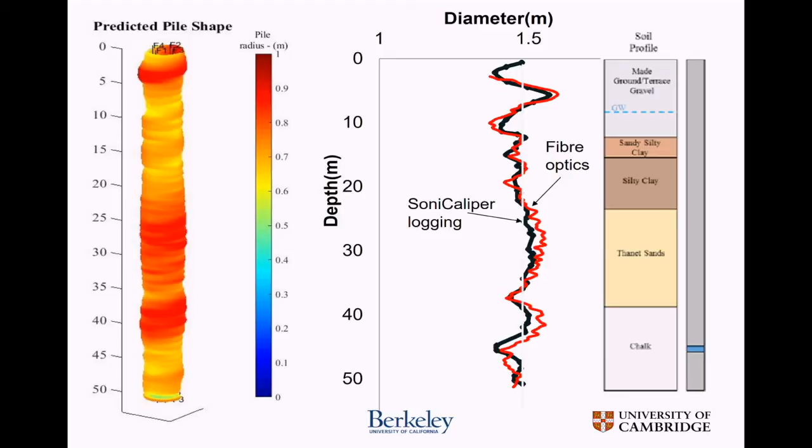Now this is interesting because now you can start to look at the quality of your infrastructure. In the construction process, we have what is called sonic logging, where we have a pipe, another pipe inside, and we do ultrasonic logging to look at the quality of the pile. The problem is that this pipe is installed inside a cage. So when the construction workers try to splice the pipes, when the cages are spliced together, you have to put your fingers inside. And then sometimes they cut their fingers and lose fingers.

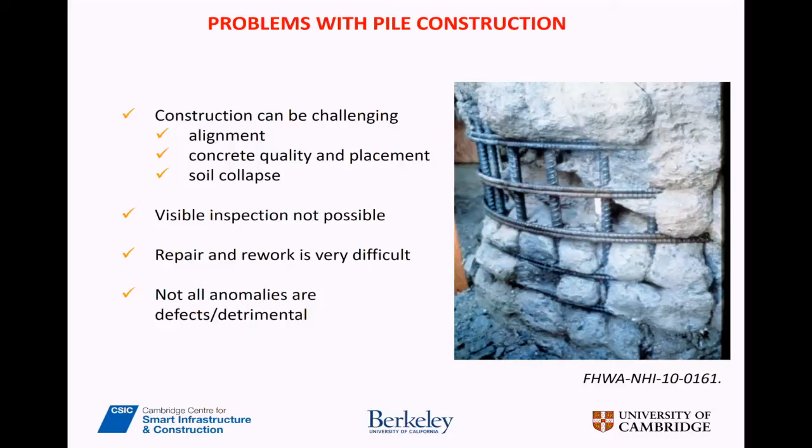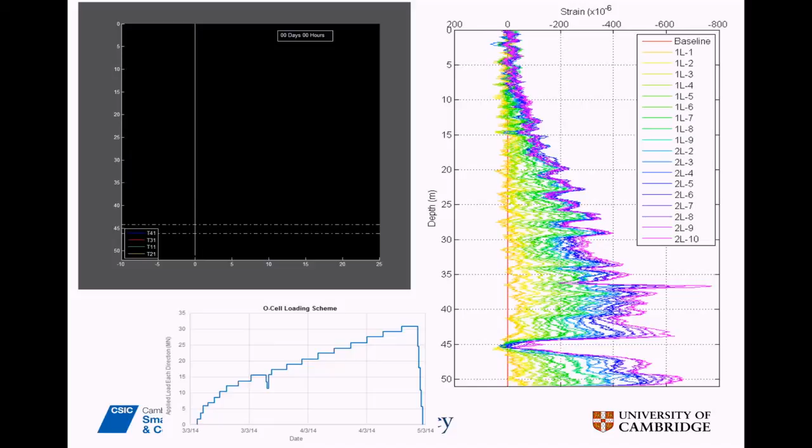With this one, you don't have to do that. So the construction workers at site said, oh, I love this device because I don't have to cut my fingers anymore. So again, my initial interest was, oh, I like this data. But actually, the driver was that people liked this one more because the demand was different. And that's where the value comes from. I thought the value was this. Of course, it is important, but the more interesting value was this.

So what I wanted to say was that there is potential for whole life management and construction quality control. You have a cable inside. You can see the actual load coming into your pile. And then if an earthquake happens, is my pile broken? You can check again. Or with nearby construction, you can do future proofing.

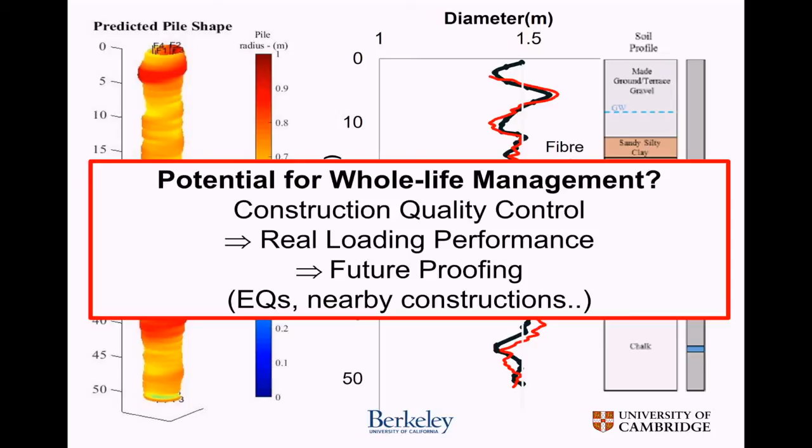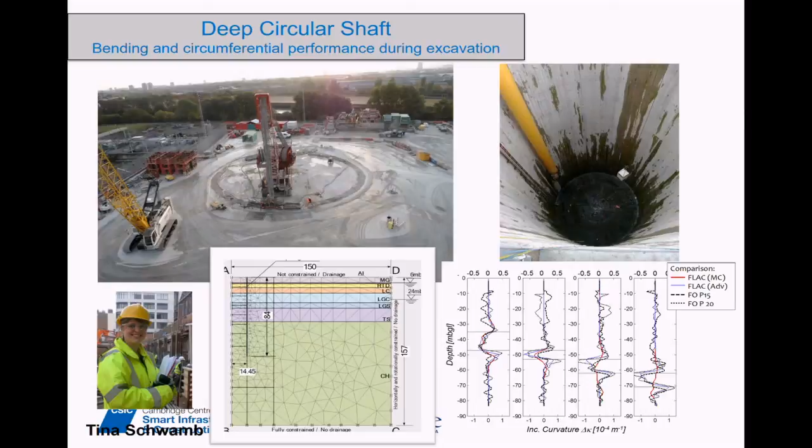So we've been doing this for many, many sites. This is one of the examples of fiber optics, but you can do it for deep circular shafts. You can do it for slope movements. Maybe you can do it for pipelines. These are for tunnels, for cross-passage openings. So these are things that you can do once you start thinking about putting optical fiber at different locations, because you can measure lots of things in one single optical fiber.

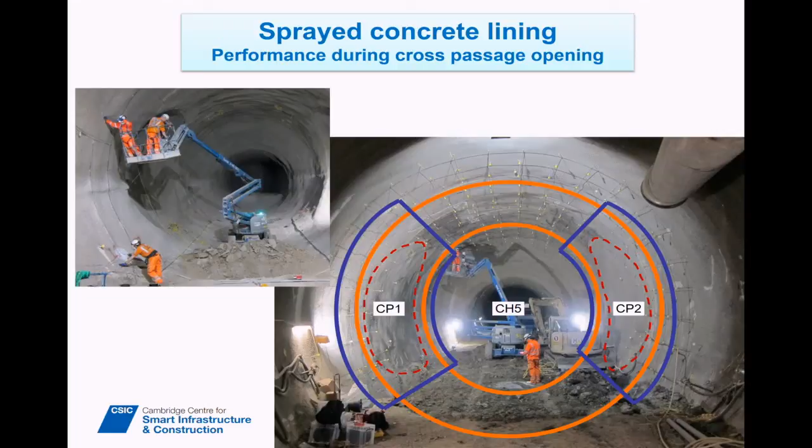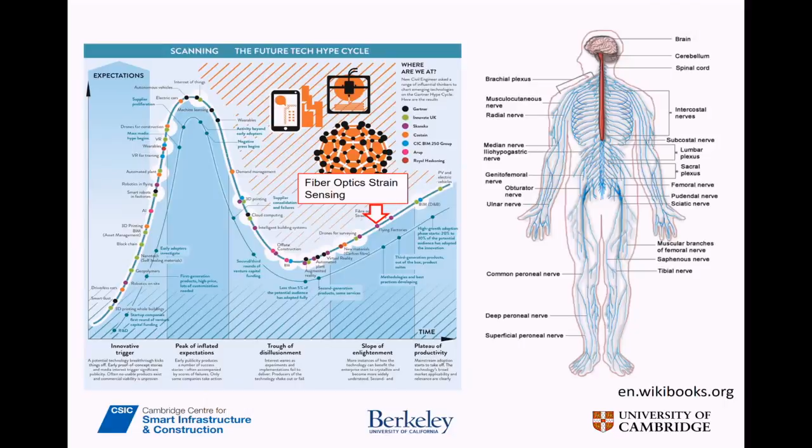Right. So what I wanted to finish off by saying is that smart infrastructure is not an isolated subject. I told you a little bit more about civil engineering today, but we're interested in the Internet of Things, pervasive embedded sensing, high-value manufacturing, data, smart cities, and BIM, Building Information Modeling, which really brings all the data together, and that is smart infrastructure. So hopefully that makes sense from your point of view.